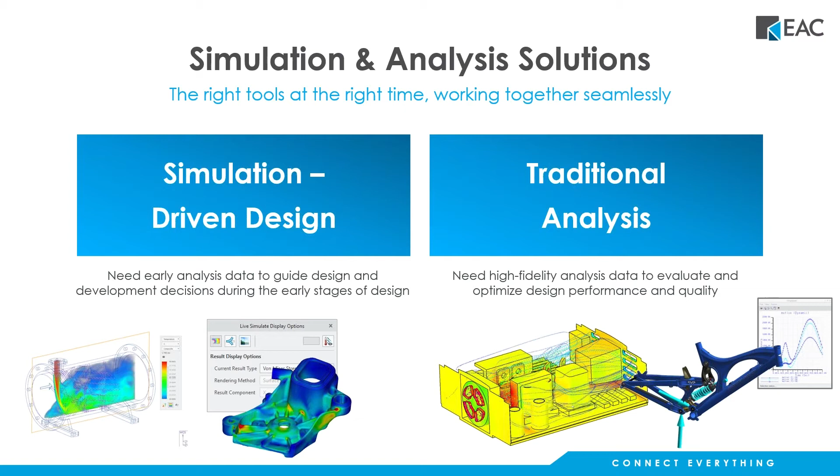So first off, if we think about the early analysis type tools, we think about Simulation Live, Generative Design, and the other items on the list. We're thinking about how do we look at our model, how do we make changes to it, what kind of changes are appropriate, am I making the right kind of changes, is it manufacturable, and we want to do some simulations and minimize the amount of physical prototypes through the use of these simulation tools and make decisions based off of that.

So the first tool we're thinking about here is Simulation Live. Creo Simulation Live is the real full name for that. Why do we need it? It's a tool that provides real-time, virtually instantaneous results about the design and the decisions we make about thermal studies, structural studies, vibrational, and now in Creo 7, flow type studies. This is powered by Ansys -- Ansys functionality integrated inside Creo Parametric that lets me do those four different types of studies.

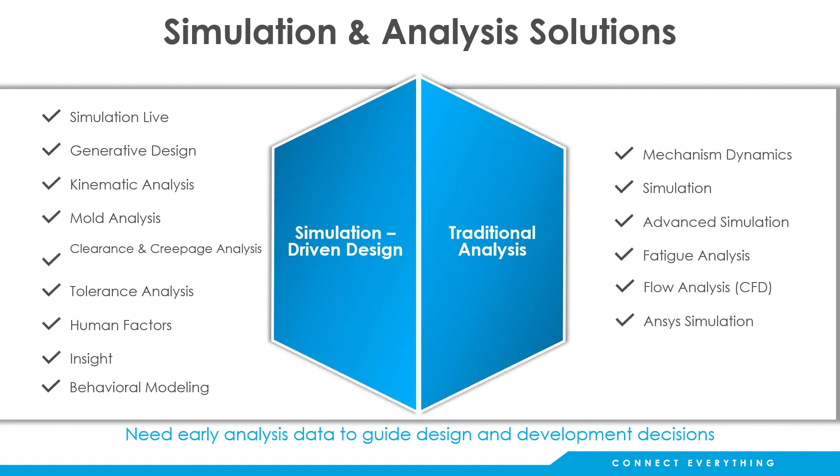Again, it's structural, thermal, vibrational, and flow type analysis. The thought process is that I'm using Creo Simulation Live to help me make general design decisions. Am I making the right features? Am I adding the right geometry? Is it trending in the way that I want? It's more of a directional tool to help me decide, do I add that rib? What's the right number of fins for a heat sink? Is the general flow over the model or through the piping system doing what I expect? Am I getting the type of behavior characteristics that I want? It's pretty much real-time information about how the model is going to behave based on the design decisions you make.

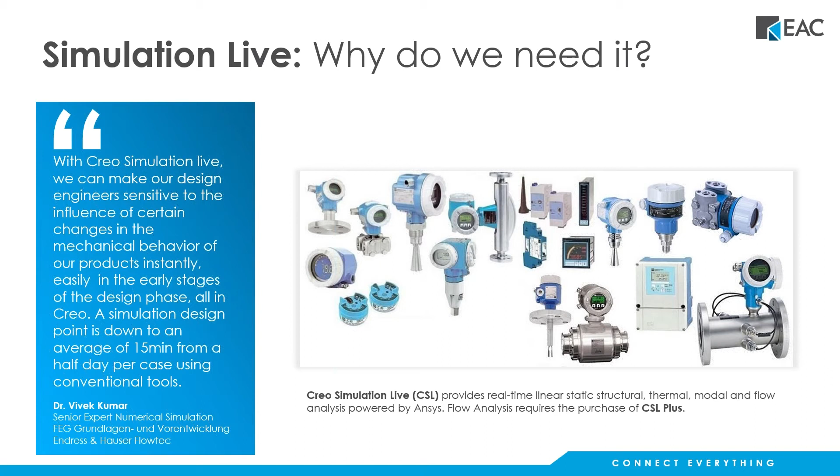The next slide talks about generative design. What do we need, what is it, and why do we need it? It's an additional extension that gives you access to making design models based on the load case. So instead of starting off with a chunk of steel or aluminum and applying design features to it, we might cut away different areas of the model. We can have the model respond to different load cases and scenarios, and have it figure out the right amount of material to have in the model, and where it needs to be to support that load case. So it's an ability to make real radical design changes, breakthrough innovations, allowing me to design and develop products, give me higher quality designs, and really change the thought process behind this.

This can also be leveraged in 3D printing. It might be tough to manufacture that part, but now with the advent of 3D printing, we can manufacture these parts and include this high performance design into our models or production and get higher performing models. It's all really based on the load case and the design criteria, the goal -- what am I trying to do with this model, and what performance characteristics do I need it to have? The generative design can help you determine what the part needs to look like in order to carry the load successfully and perform the way you need to, while minimizing mass and making it as efficient and effective as possible.

And of course, on these slides, we'll have some examples of how different companies have used the different functionality. In this case, we're talking about Volvo, which is using generative design to transform how they make parts and go through a real aggressive weight reduction program.

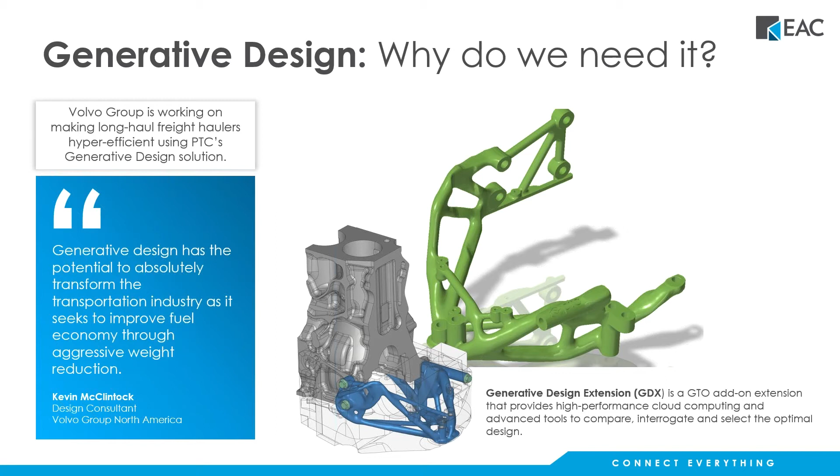Kinematic Analysis. You might think of this as part of your base suite of Creo Parametric. It's the mechanism design extension, so everybody should have access to that in a modern Creo license. This is a tool set that lets you put your assemblies together very much like you would in the shop, using connections like a ball joint, a pin joint, or a slider joint, that lets you run the model through kinematic studies.

You can do range of motion, fit and interference type studies, and look at the model like you would put it together in the shop, and make sure you don't have any issues with that mechanism before you actually start to put it together and make parts. Again, everybody should have access to that kinematic study tool set with the mechanism design extension.

Next, we would talk about mold analysis and why do we need it. If you're designing injection molded plastic parts, one of the things you might be interested in is: is that part actually manufacturable based on the design that I currently have? A lot of times people will design the part and give that to their supplier, and then the supplier has to figure out what's the gate location, how many gates do I need, is that even manufacturable, will I get a short shot?

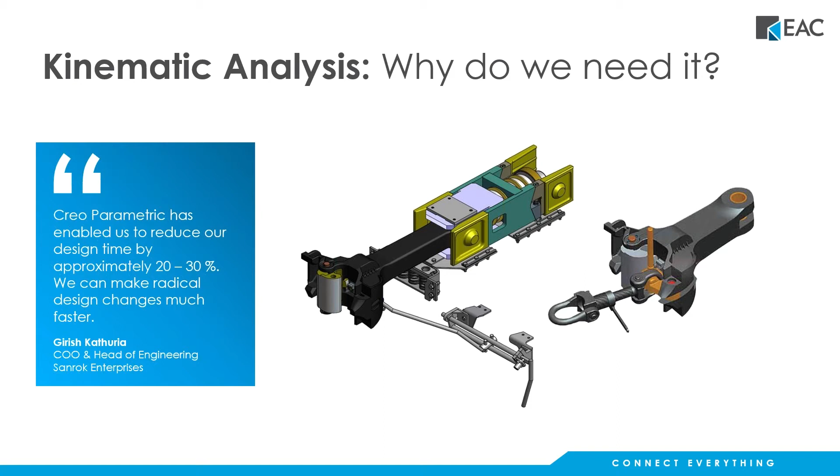Will I get the quality of the part that I need? Will I have sink marks? Will I have air traps and weld lines? I'll probably have those things, but where will they be located in the model? And is that okay for me to have those at those locations, or do I need to consider design changes or other things to help me get the quality of the part that I want?

Again, the idea is to incorporate that thought process into the design early on in the process, so I don't have to try and figure out what happens after I've cut steel for the tool, where I have to change a gate location or make some other modification. It's much more expensive to do that in steel than it is in the simulation tool. So again, we're just highlighting the different tools that we have and how you can incorporate those into your design process.

Another tool that we have is the clearance and creepage analysis. In this case, we use this tool to identify electrical clearance and creepage design flaws. What you can do here is validate and optimize for electrical product safety to improve the quality and protect the company. The idea is to take a look at the model as it's designed and figure out whether I have a proper clearance between different electrical components.

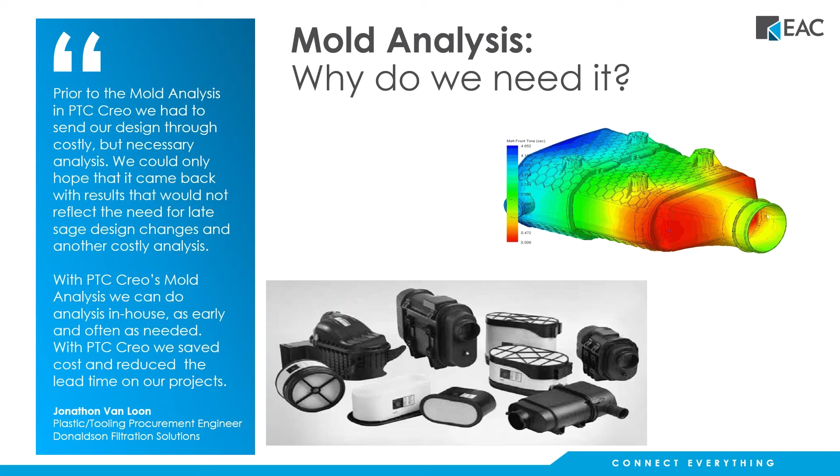Do I need to put in some sort of insulating material or different geometry in the model to make sure that I don't have any undesired electrical arcing happen if I don't take care of that? Again, it's a different set of tools that lets me look at my overall assembly from the electrical standpoint and determine if I might need to make changes, like relocating fibers or adding other geometry to protect the assembly.

Tolerance analysis: this tool set takes a look at our model and thinks about it from the manufacturing standpoint for manufacturability. We have tolerance stack up and gap analysis tools that let me identify and modify critical tolerances to give me the quality and manufacturability targets, and I can attain them.

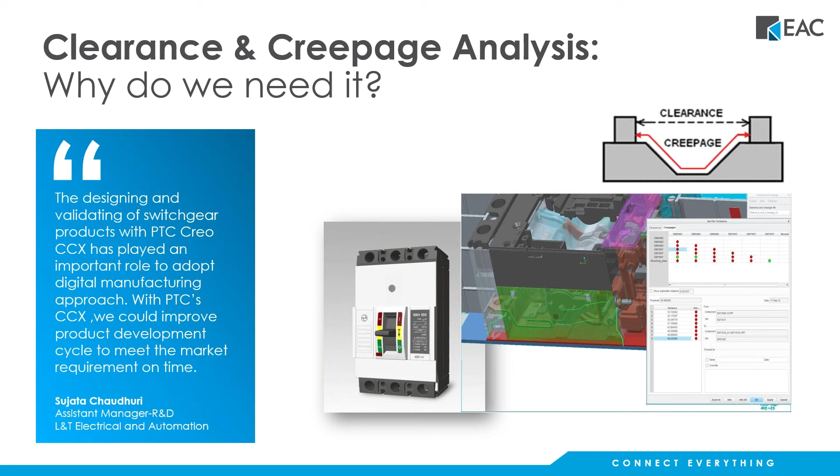We can look at this from the standpoint of the features in the model and say, if I manufacture this to maximum or minimum material conditions, am I going to be able to assemble this? It helps me understand which dimensions are critical to hold tolerance on, and which ones are a little less significant, making that part or assembly more manufacturable, and helps me understand the things I can safely change without having any downstream issues with the model.

So thinking in terms of Six Sigma and tolerance analysis, it's really a drive for a lot of companies to improve their product design, and this is a tool that you can use to help you figure out which characteristics are important for your model.

Human factors. You might see this in the ribbon in your Creo assemblies. This allows you to put a mannequin into your assembly, and that's kind of fun initially, but why do I care? Why do I need that? Well, we can do studies with that.

We can look at how people are going to actually interact with your model or your design. Can they actually reach the control panel? Can they safely hold that position for a certain period of time? You can do different types of studies for ergonomics, range of motion, field of view, and things like that. Can the 5th percentile woman actually reach that control and move that lever, or do I need to move that to a different location so it's safely reached or activated?

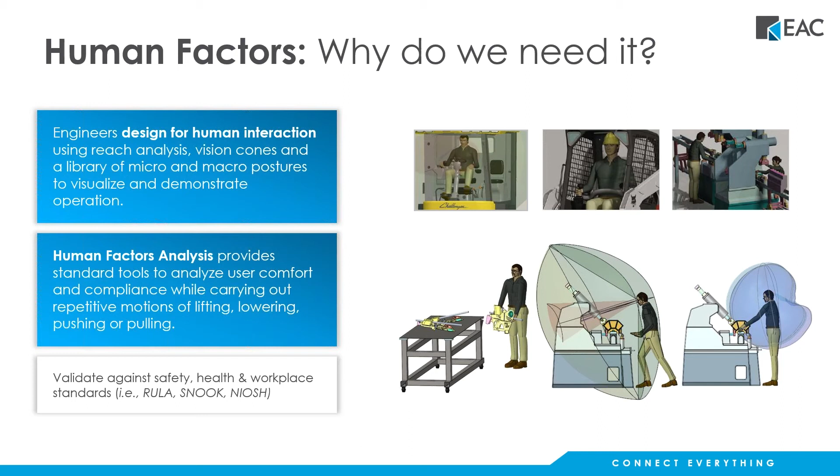I can get sensor information from the field, and I can then use that for simulation or different design studies. So instead of making assumptions based on what I think that load case is going to be, I can get real-time data back from the field, from the actual product as it's operating and doing its thing, and show what that's going to look like in Creo dynamically.

So again, it's Creo Product Insight that lets me connect to my product in the field and show what that's going to do inside the Creo design environment.

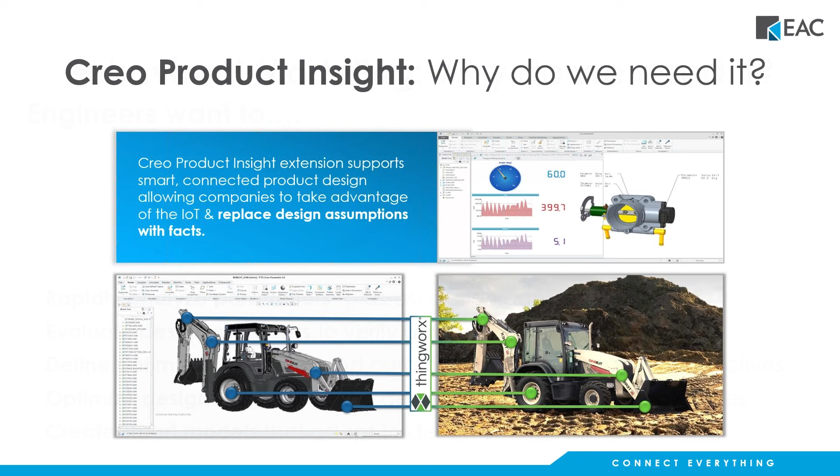Behavioral modeling. A lot of times what happens is, as a design engineer, I would oftentimes make changes to the model and try to figure out, well, if I make this dimensional change, if I move this feature to that location, what does that do to the model? How does that change my design performance or design envelope? And a lot of times I felt like I was throwing darts at a dartboard.

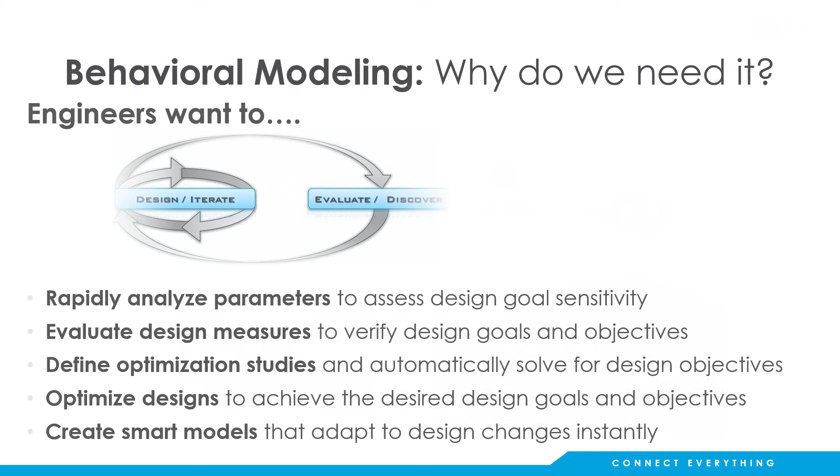You make a change and then you do some other test or simulation, and then you say, well, it kind of did what I wanted, but maybe not really. Then I've got other dimensions or parameters I can change to the model, and I start moving things around. It's oftentimes really hard to understand what the changes I'm making in the model actually do to the performance of the model.

Well, with behavioral modeling, we can short circuit that process and say, you know what, I've got a certain goal. I want to maybe minimize the mass, or take a surface area and make sure I maximize that, or I've got some other design goal based on geometry, and I want to drive that to a certain state.

I want to move center of gravity to the axis of rotation on a shaft, or if I'm going to pick something up, I need to know where the CG is, and I need to maybe move around the lifting lugs so I can better control that mass or object I'm picking up based on where the CG is. So obviously I can make changes to that quickly and easily inside Creo, but what impact does that have when I do that?

Right? So behavioral modeling lets me sort of target that. I can say I've got this goal that I want to achieve, and then I can assign other different objectives, right? Maybe minimize the mass or something like that, or minimize the distance between a CG and an axis of rotation.

Then I can use different design studies to help me figure out which parameters or dimensions are really significant and which ones to ignore. And then I can use the results from that to do an optimization or a feasibility study that lets me drive that to that goal.

So instead of me sitting at my desk throwing darts at a dartboard, I can use behavioral modeling to get a better understanding of what the model's actually doing based on the dimensional changes or parameter changes I'm making. So again, behavioral modeling is a real nice tool to help me do true engineering instead of just taking a swing at things and making dimensional changes.

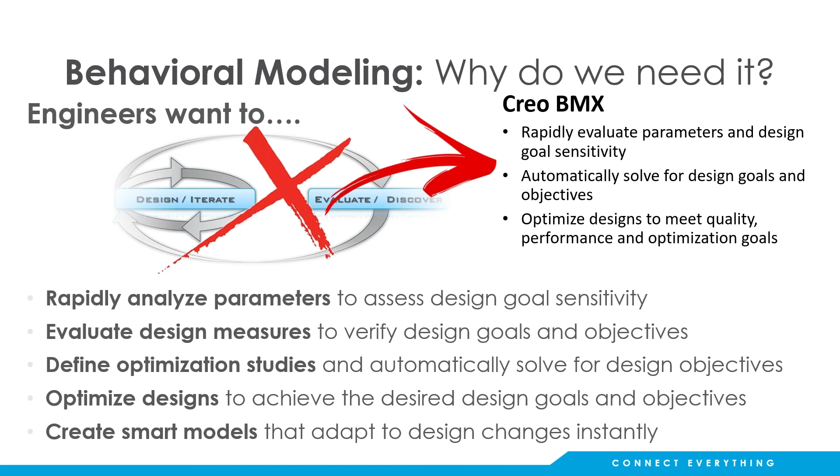The idea here is that we're creating higher-end analyses and looking at the tools that we'll be using to do that. So the first one is mechanism dynamics, and this is really the second half of the mechanism functionality that's inside Creo. MDX, or mechanism design extension, everybody has that, and mechanism dynamics is an additional optional module that lets you do dynamic studies.

This will help you understand how forces and torques that you apply to the system result in the motion of the system. So you can do dynamic studies, and you can include things like friction, dampers, springs, gears, belts, gravity, and those types of things. You can have it calculate reactions at locations of the model, forces, velocity, acceleration, things like that.

Those results from your dynamic study can be brought into Creo Simulate or Creo Simulate Live, and then used to do further studies from there. This is really sort of the one-two punch of mechanisms inside Creo: you can set up the model with kinematics, and then do dynamic studies on that to help drive the design and do more detailed studies on it.

Then we talk about Creo Simulation. There's several different tools that have the word simulation in the name, so let's talk about them and differentiate between what they are.

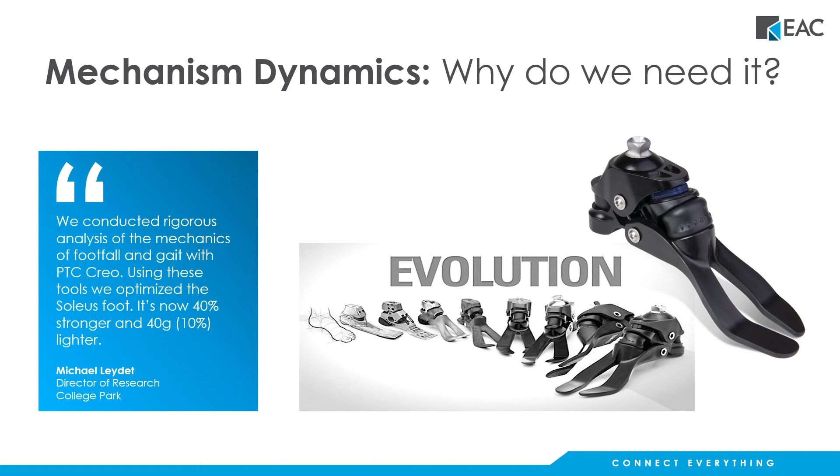This is probably used a little bit later in the design process. So you might use Creo Simulate Live, which we'll talk about in a minute. We'll talk about the tools of Creo Simulate, so you can do more detailed, high resolution studies, sensitivities - which parameters are important, which ones can I ignore - and optimizations. So I want to minimize the mass, but then keep the stress below a certain value, and drive toward an optimum design using that tool.

So again, it's very similar to behavioral modeling, except the focus here is on structural, thermal, and vibrational type results, whereas behavioral modeling is more geometry based. Think in terms of the measurements that you create inside Creo, like areas, volumes, distances, other mass properties, things like that. Creo Simulate is really focused on more of a traditional structural, thermal, or vibrational type analysis.

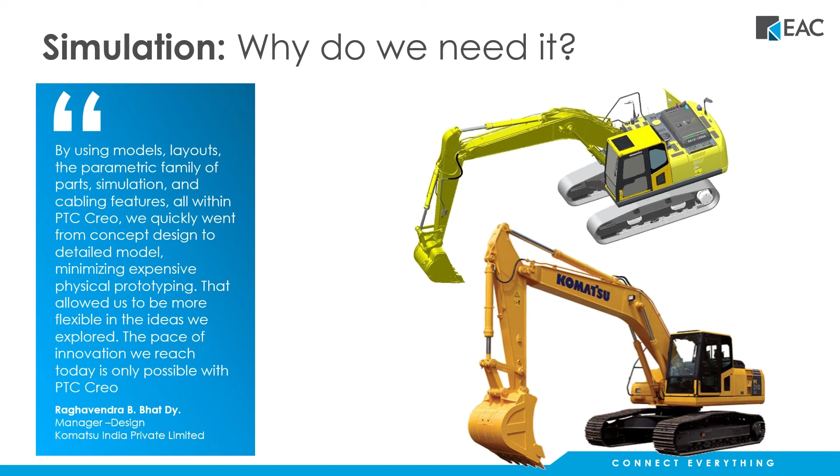Then advanced simulation, that takes and builds upon Creo Simulate and gives you some additional capabilities for nonlinear materials, nonlinear contact, large deformation, pre-stress static and modal analyses, transient structural and thermal analyses. Things like composites and those types of things are also included in the advanced version of Creo Simulate. So that's the different tools as far as Creo Simulate.

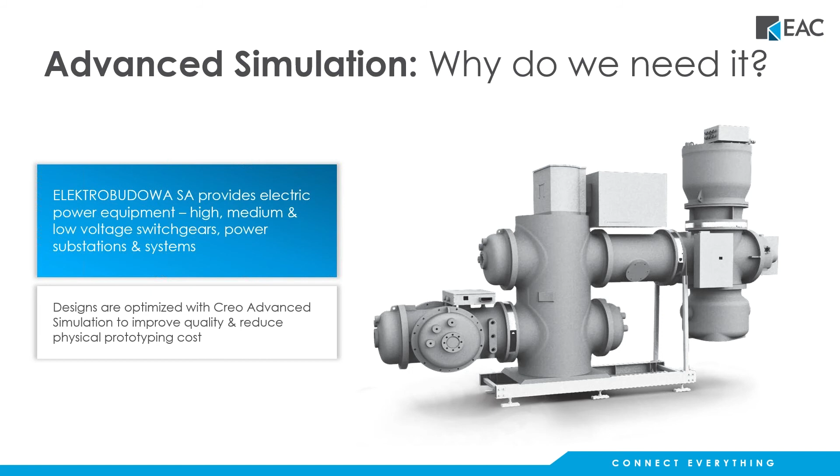Additionally, there's Fatigue Advisor. What this does is extend the capabilities of Creo Simulate, and this is a tool that is used to predict the life of metal structures that are often prone to fatigue with cyclic loading type conditions. A typical example everybody thinks about is bending a paperclip a bunch of times - you can do that for a while, but at some point that's going to break down, right? And that's a fatigue situation.

So you'd use Fatigue Advisor to help you figure out what you might do to your design to change or minimize the impact of that cyclic loading on your model, so it can perform the number of life cycles that you need it to before it should actually fail. Again, the idea is I want to build prototypes digitally here before I actually go out to the shop and into the field and create models or prototypes there.

Next, we would talk about flow analysis. This is a tool available through PTC and their partner Simerics, integrated inside Creo Simulate. What we're looking at here is the ability to do CFD type studies used to identify design flaws early in the process.

Different types of flow studies, both internal and external, are available for CFD type studies. People have asked for this kind of functionality from PTC for a long time, and they've established a partnership with Simerics to give us access to those capabilities now integrated inside of Creo Parametric.

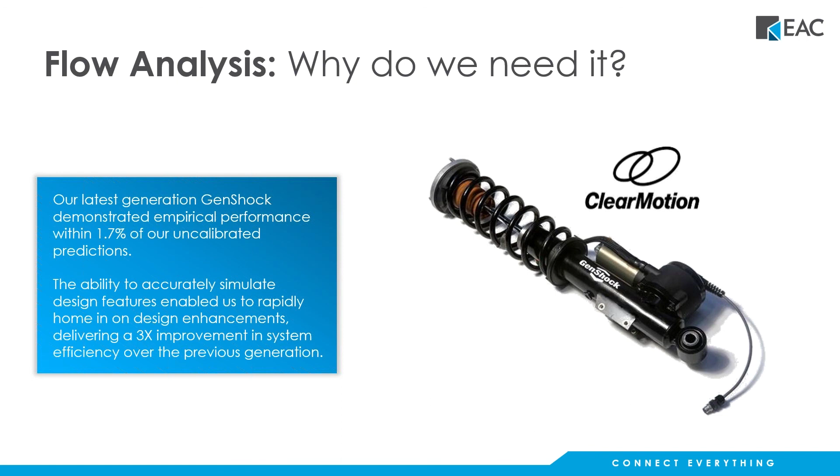The analog tool for that is Creo Simulate Live, right? So there are two different levels of Ansys functionality now available inside Creo Parametric. Creo Simulate Live is that more predictive tool used early on in the design process, helping me understand if I'm making good design decisions as I'm adding geometry or moving things around. When I want a more detailed result, I might look at either Creo Simulate or the Creo Ansys solution for a more complete result.

So that's an overview of all the different modules and items that are available. Sorry, it ends up being more of a PowerPoint presentation. We can certainly look at things live if people have certain questions about any of the specific areas of functionality. I don't know, Addison, if we have any questions at this point that have shown up in the queue.

I don't see any questions right now.

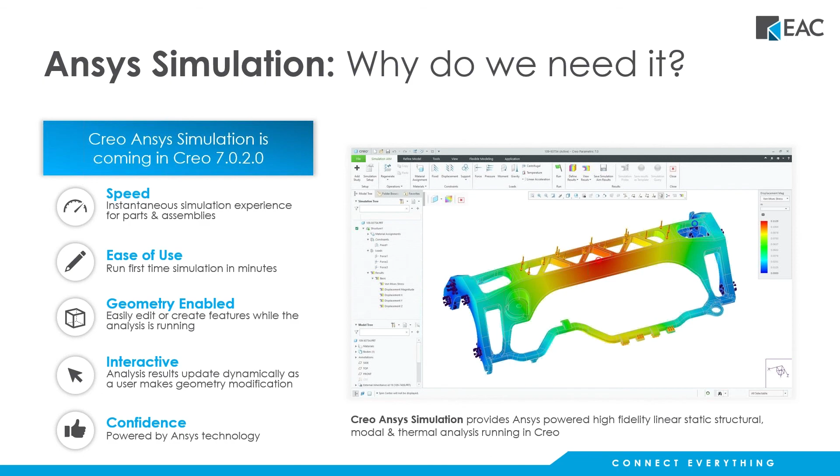Okay, well, that largely covers what I had. I have some appendix type information I can cover briefly. This is talking about maybe some future information as far as what the differences are between Creo Simulate and the Creo Ansys solution, and what's covered and what's coming. We can talk about that, and then some additional future information coming as far as Creo 9, but that's a little ways over the horizon. And then product capabilities as far as Creo 9 and 10.

So it hasn't been necessarily a lot of time on that. If people have questions, we can certainly dive into that as needed. That's what I have for the presentation. If people wanted to look at some additional or specific functionality, we can. I know that we have done several webinars that cover a lot of these topics, so that might be something we can reference too if you have specific questions. I know we've done them on Creo Simulate Live and behavioral modeling in Creo Simulate, and I did one on flow analysis too, but if there are questions on that, happy to entertain those now.

Right, and I don't see any questions popping up so far.